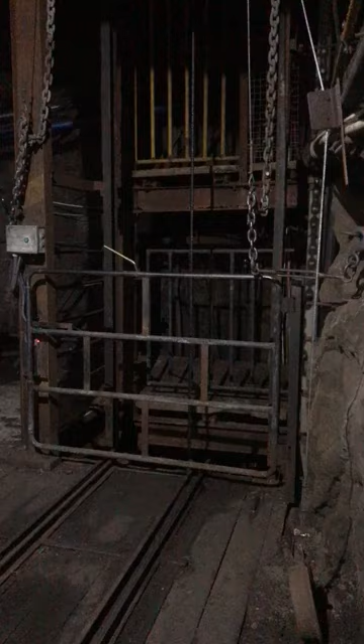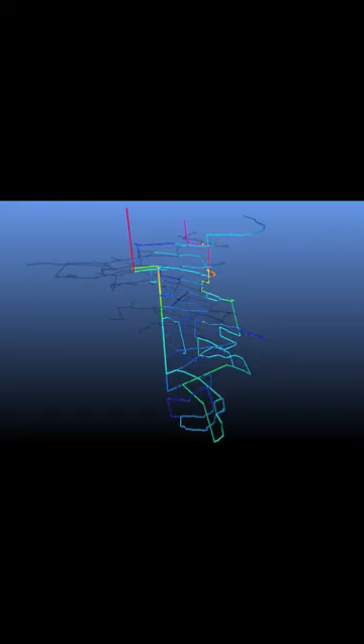We hereby present the improvement of the ventilation system of Bogala mine, which is to be worked for a depth of 500 meters. This project is a ventilation on demand. Bogala mine is spread over a fairly large area, and there are many crosscuts, drives, winzes and rises in the mine. The ventilation system of this mine is quite complex, and due to its current conditions, not all areas are ventilated to the required extent. Some areas are ventilated more than necessary, while others are not.

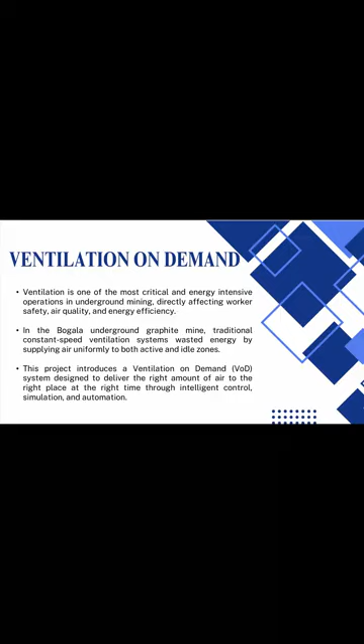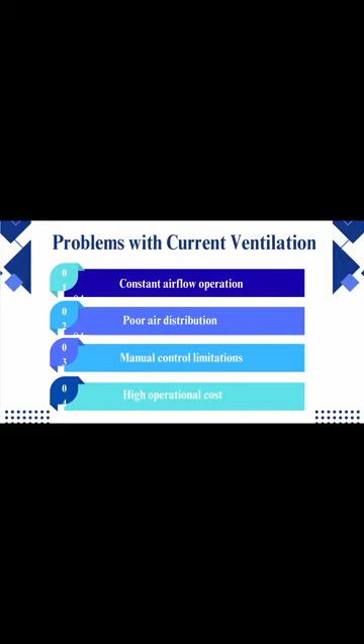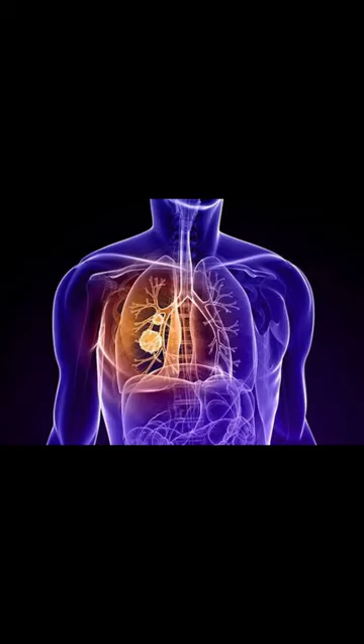However, people work in almost all of these places, and those working in some places do not receive sufficient airflow to remove the dust and harmful gases generated after an explosion. Due to this, the possibility of serious diseases like carbon monoxide poisoning, lung cancer, chronic bronchitis and pneumonia is high for the workers. This is a life-threatening condition.

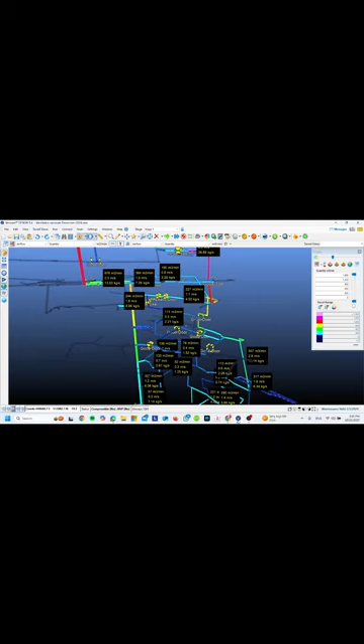To avoid this, we have redesigned the ventilation system here. Simply put, air is supplied in the right quantities to the right places, minimizing energy loss and ventilation loss. For this, we use the Ventsim Design software to create a digital twin of it and use it to create several models to provide air to the required locations. Now, you can see a description of it.

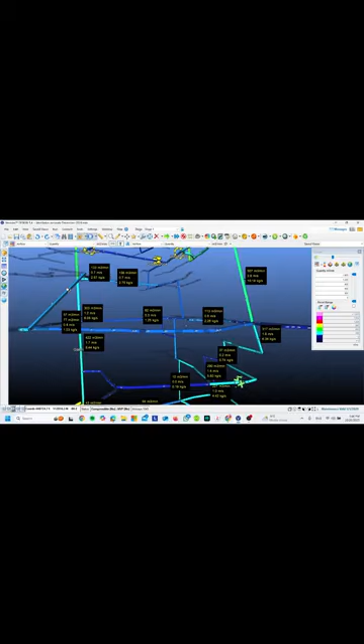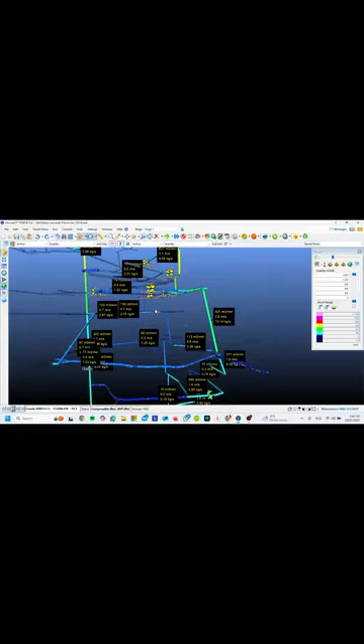Before the optimization, the ventilation network at Bogala mine was unbalanced. At the 170 fathom level, the airflow was clearly insufficient. Meanwhile, the booster fan at 275 fathom was increasing in volume, but overall efficiency was poor. In this situation, the main exhaust fan was drawing about 40 kW per hour to move approximately 1500 cubic meter per minute, an inefficient operating point.

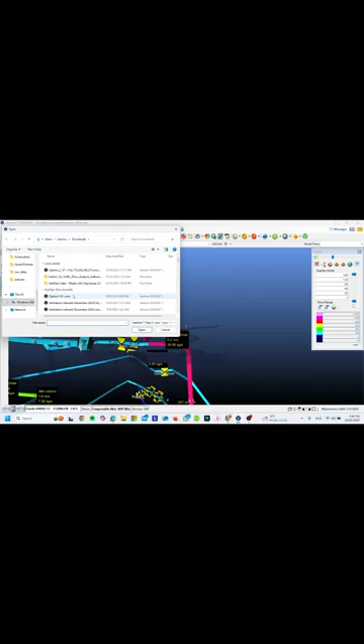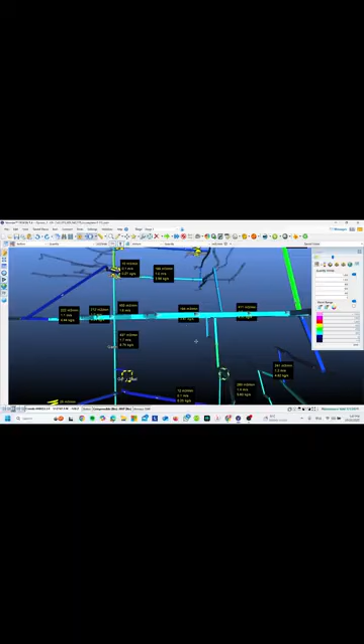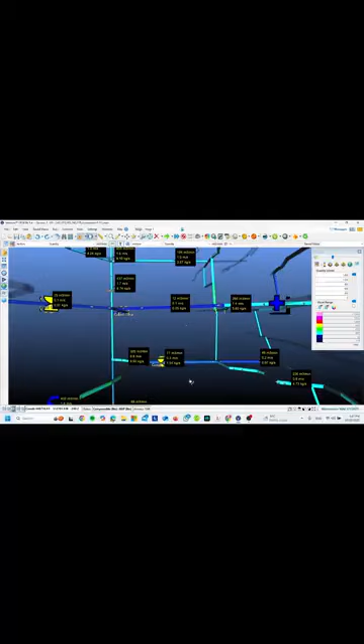The solution was a targeted reconfiguration. The booster fan was moved to the 205 fathom level and its flow path was changed to better support the upstream district. In parallel, air control was tightened by adding doors, installing doors with regulators and fine-tuning them so that air only goes where and when it's needed. The results were immediate. The 170 fathom level now receives strong, reliable airflow and previously underventilated areas are properly supplied. The 205 fathom booster now provides just the boost needed, no more, no less.

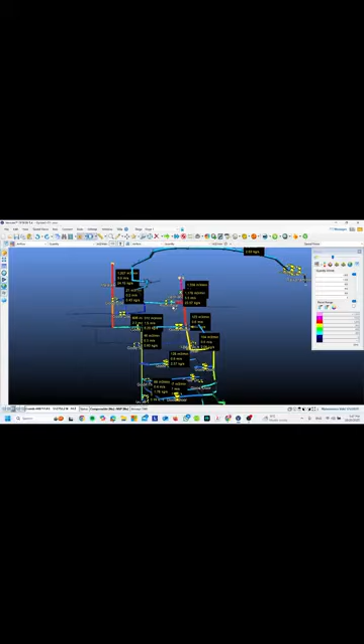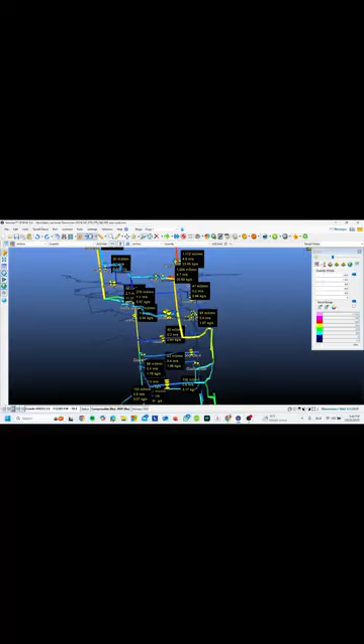Most importantly, energy performance has improved. The main exhaust fan now maintains the mine at 1338 cubic meter per minute with a power draw of 28 kW per hour and can operate as low as 1172 cubic meter per minute at 20 kW per hour when conditions allow. That's a significant reduction in power for a healthier, better controlled underground environment.

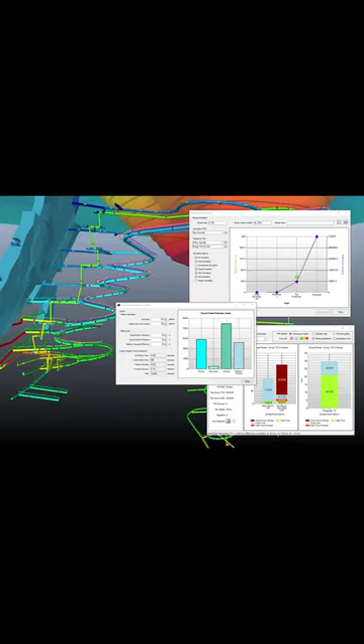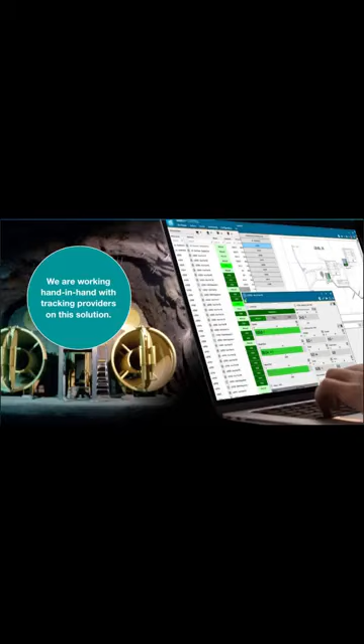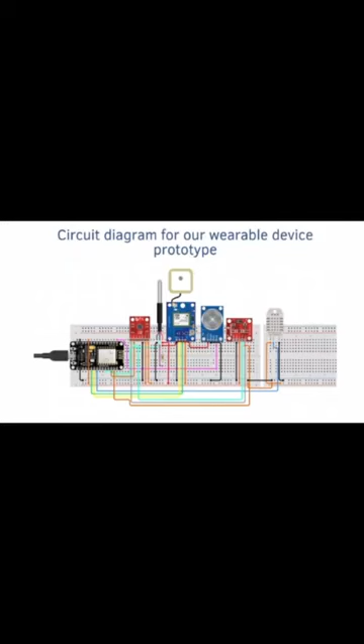In addition, the Design software can be used to control the electric roller doors and fans installed in the mine, and we obtain information about real-time data in the mine. However, this license costs 10 million rupees, and as a solution, we have built a mine control system. Using that system, we can control the doors and fans and monitor real-time data. In addition, by comparing the data, the speed of the fans is automatically changed, maintaining the balance of the mine's ventilation system and automating the doors. Now you can see it. The special thing here is that there are limitations in Ventsim depending on the amount paid, and there are no such limitations in our control system.

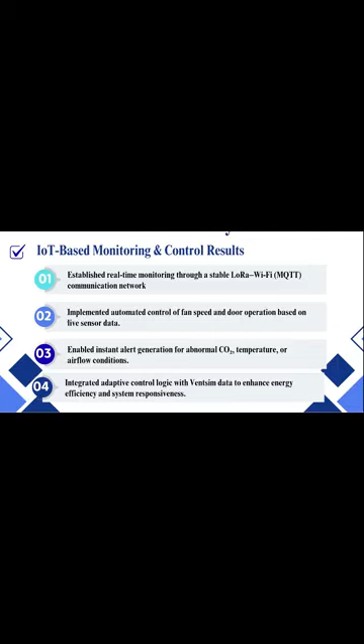Now I will briefly explain the application we developed for the ventilation on demand system. This application is designed for two types of users, operators and administrators. Everyone can log into the system, but only administrators have access to the setting and configuration panels, while operators can only use the monitoring and control function. In the main function section of the application, the system is divided into 4 key parts. The first part is the manual control panel. In here, users can manually control any ventilation door or fan in the mine. It is mainly used during maintenance, emergency or when automatic doors need to be overridden.

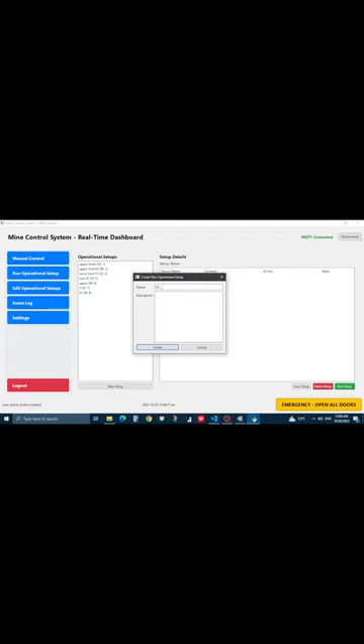The second option is run operational setup. This section displays all the previously saved operational setups. A setup defines which doors are open and what fan speeds are used for the specific shift or working condition. The third option is edit operational setup. In this section, admin can create or modify setups. They can select which door should remain open or closed, set fan speed percentage and save the configuration for further operations. Next one is event log. This keeps a record of all activities inside the system. It shows who logged in, what action they performed and at what time, ensuring full

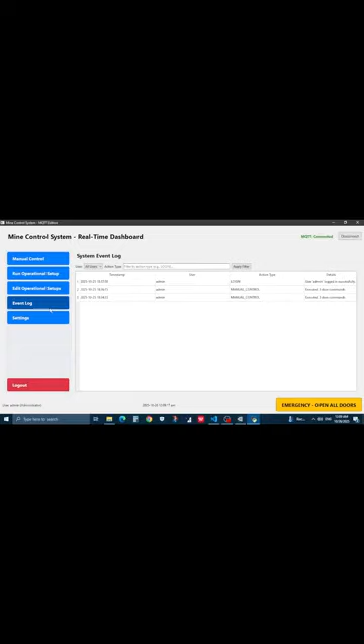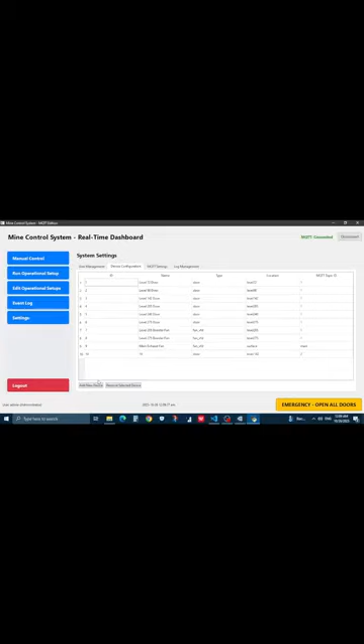traceability and accountability. In the settings section, the setting menu is restricted to the administrator and includes 4 subsections. The first one is user management. In this, we can add, remove or assign a role to the users. The second one is device configuration. In this, we can add and register new doors, fans, controls or sensors. The third option is MQTT settings. In this, we can set up broker details for communication between underground devices and the central system. Next one is log management. In this, manage data storage, backup and clear all logs.

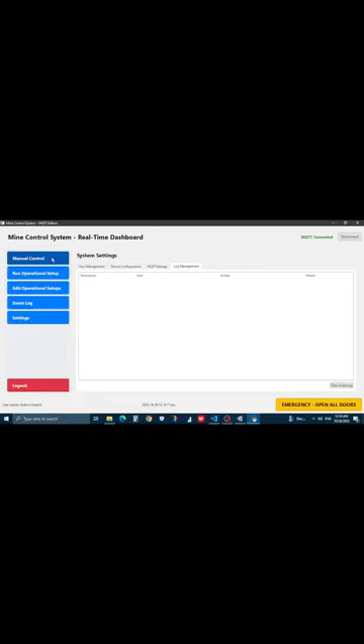In this system, an additional key function is the emergency button. It instantly opens all ventilation doors in case of fire or network failure. And also there is a logout button to safely exit the system and prevent unauthorized access. When we execute the command, it goes through the MQTT broker. Each door or fan also connects to this broker. Then the commands are transferred in both directions through this broker and run.

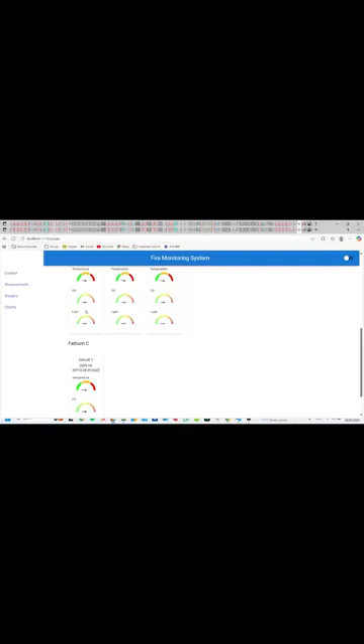This part of the interface provides a detailed description of the real-time data. The measurement panel also shows a comparison of the real-time data provided by the Arduino kit for each fathom level with the data we prepared using the Ventsim software. The importance of this is that we can check whether the ventilation system of the mine is working properly. The gauges panel provides a graphical description of it, and the charts panel provides a comparison of the current and previous conditions.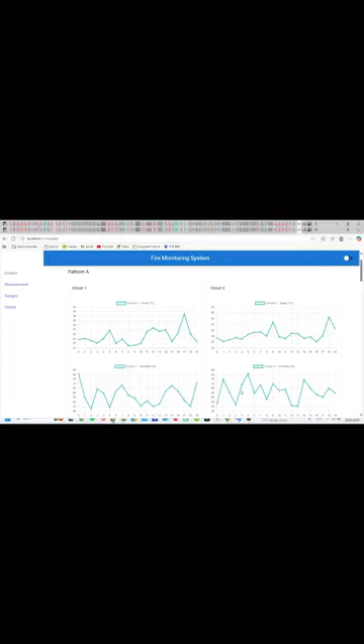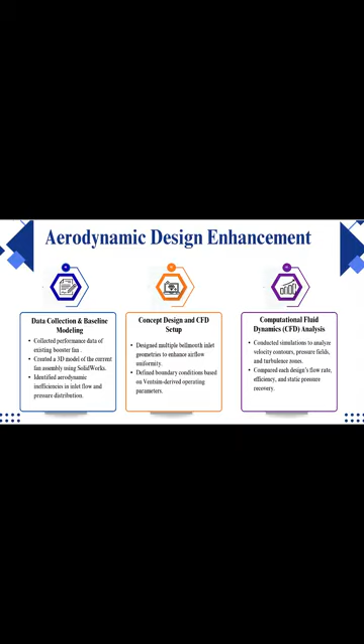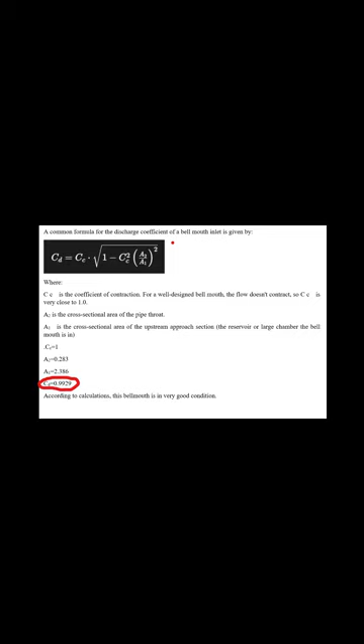Finally, we designed a bell mouth for a booster fan to see if it could replace the main exhaust fan, which uses more energy. According to the results we got, it can be done. The CAD design of this bell mouth is unique in that its discharge coefficient is 0.9929. You can see the calculations here. The confirmation obtained from the CFD analysis of this bell mouth shows that a large energy saving can be achieved by connecting this bell mouth and operating the fan.

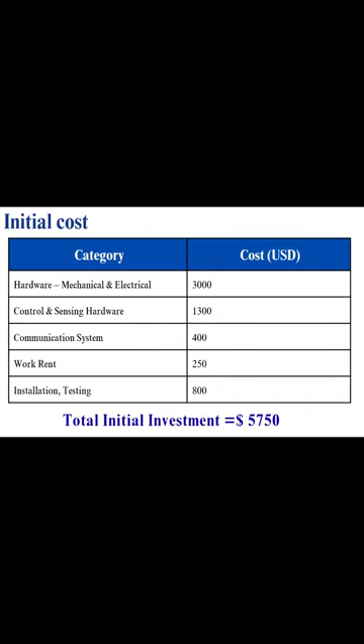The result of all this was that the life risks the miners had so far were reduced and they received a more favorable and comfortable environmental condition. In addition, the annual electricity consumption was reduced by 41% from 184.3 megawatt to 110.02 megawatt. We are happy to be able to contribute to energy conservation in the mine as well as in the country. All this was done at an initial cost of only $5,750.